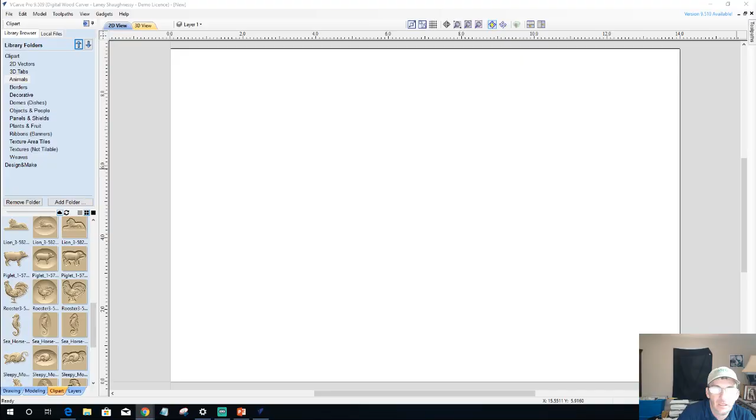So what we're going to do is hang out for a moment. If you guys have any questions, go ahead and ask them while we let everybody pile in. We're about 6 minutes early, I figured I'd come in. I saw Dave and Alan and Todd and Debbie pop in, so I thought I would pop in and say hi to you all.

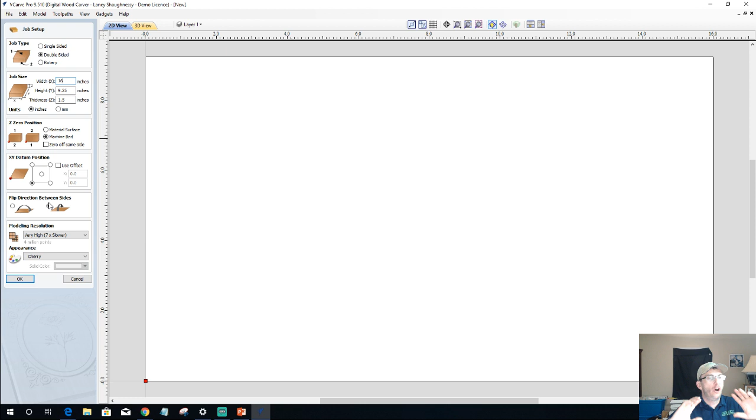Now I will be flipping my board along my y-axis for my two-sided project, so I have that selected. I'm going to click OK, and that's going to set us up and get us going.

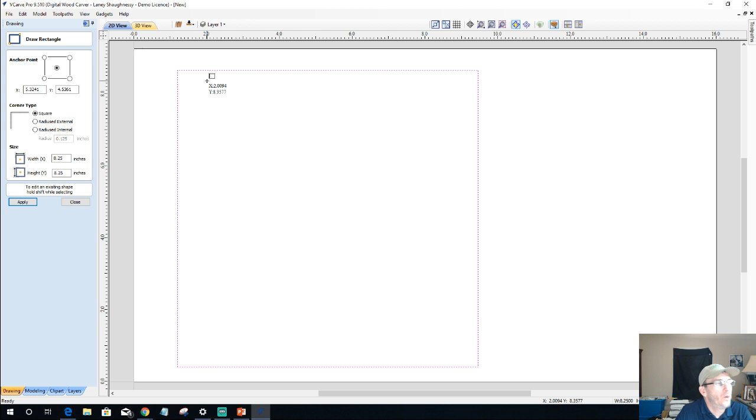What I want to do is reference everything off of, even when I'm doing my profiles and things like that, a rectangle. We need that 90-degree angle anyway, so this just kind of gives me that look, and now I can come in and start laying out my design.

One of the things is I want to offset inward this rectangle. I'm going to close the rectangle tool and use the offset tool to offset inward about 3/4 of an inch. Imagine this being my frame, and I'm going to have that back piece.

Now, when it comes to the actual corbels themselves, you can just make the decorative part and then make the 2 flats that you would miter cut together to create that 90-degree angle and everything.

If I were to illustrate that, let's say if we had one part here, one part here. Let me do some scissor trimming.

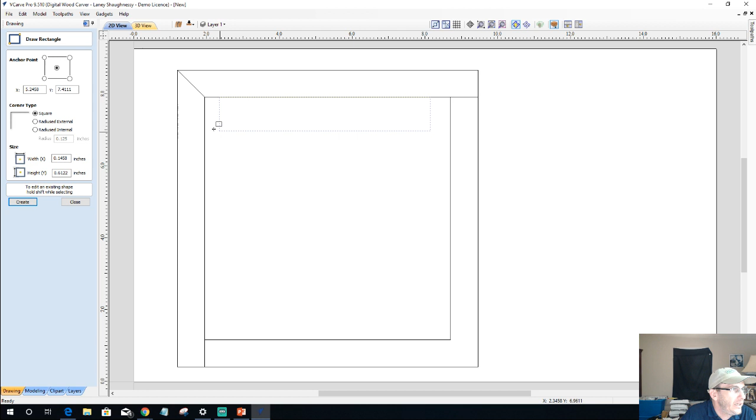So imagine you've got your 2 parts mitered together to create that 90-degree turn. A lot of times someone will do that and it'll have a decorative edge on it, and then of course they will have a smaller inner part. I'm just freehand drawing right now just to illustrate this.

That part would also generally, a lot of times, do a butt joint on that, but you could also miter that as well. Not the straightest looking angle in the world, but you can create that kind of corbel frame type of thing, and then your decorative part would be in here.

Now, one of the projects we're going to make, I'll give you a little sneak peek, and then we're going to go drawing the 2D stuff first. Imagine if I came into my clip art and let's go into the animals. I'm going to grab this seahorse here.

Let's go ahead and mirror him. I don't want to create a mirror copy, I don't want to flip it about job center, I just want to mirror him the other direction. I'd probably go right about here, and then there would be some material that's connecting him back here. But imagine a decorative little seahorse corbel, which we will be making in this class here in a moment.

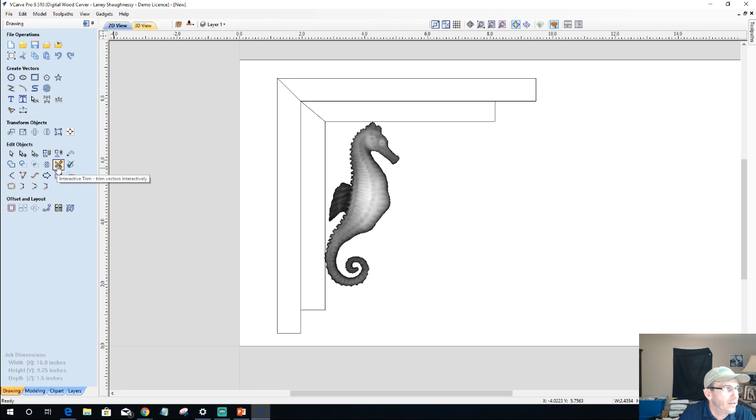So I was using the rectangle tool under the Create Vectors menu, the third icon, first row, to create the rectangles. I was also using the line drawing tool, which is the first icon on the second row under Create Vectors. And for trimming, I was using the interactive trim tool under Edit Objects menu, second row, fifth icon. So that's what we're working with.

But imagine we're going to be making this two-sided seahorse project in a few moments, but not right now. I just wanted to give you some visuals to think about. Okay, let's get rid of some of this stuff, and I'm going to get rid of everything actually.

And I'm going to go back with my 8 1/4 by 8 1/4. Now I want to talk to you about version 9 as I go, kind of little lessons here and everything.

With my rectangle tool, I can start drawing out my rectangle, and if I pause, keeping my left mouse button held down, I can just type in 8.25, a comma, that'll give me my width, then 8.25, and hit the enter key to create my 8 1/4 by 8 1/4 box. I can also use the menu over here if I wanted to, but I can freehand and type in those actions right away.

Now, top tip of the day. One of the newest and coolest things as of version 9 - we're working in 9.5 right now - is some of the enhanced shape editing tool enhancements that are available to us.

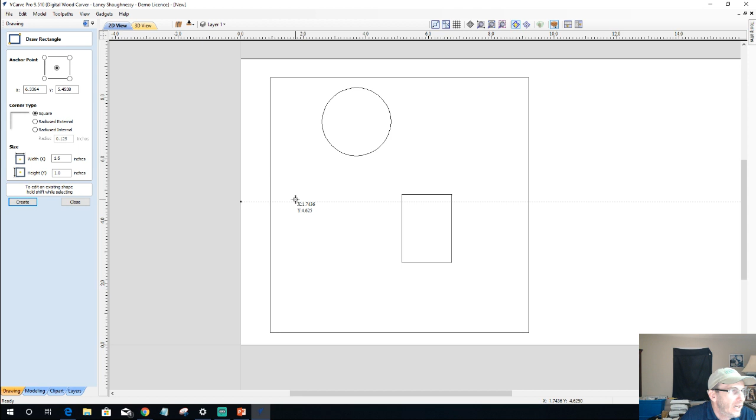Well, your shift key - if I had my rectangle tool open and I wanted to edit this rectangle, if I hold my shift key down, it will allow me to select that shape, and then I can come in and edit it however I want. So there's a little keynote down here: to edit an existing shape, hold the shift key while selecting it.

Just a little top tip. They do put the tip right here for you in your rectangle tool, but some of you might not have really seen that or paid too much attention to it, and just thought that would be something of interest to you. All right, we're done with that.

All right, so the first thing I'm going to do is come back and get where we were. I'm going to offset inward three-quarters of an inch. This is going to be kind of my working area, my decorative working area in here.

So what I want to do is go into node editing mode here, and I'm going to delete this node on the bottom right corner, delete that point so I can kind of get this triangle going on here. This is going to be my working area for the decorative part of my corbel.

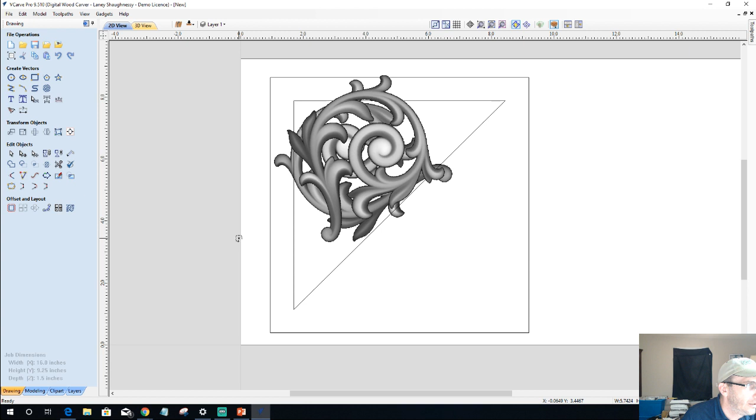And then I'm going to rotate it - just freehand rotate it, like that, slow motion. Let's go there. And then I'm going to size it. Well, let's move it into place first. I'm going to have it probably about like that, and let's see if I stretch this out a little bit. Let's rotate it some more.

Right about there. All right, now what I'm going to use in the modeling tools is a tool called Create Vector Boundary around a selected component. This will allow me to basically trace this model in a sense. So I'm going to use that - I've got my selected component, and I'm going to create the vector boundaries around it.

And now with that, I can go ahead and delete my model to give me the vector outlines for that trace. Now, on these back sides here, if I wanted to create my two shapes and things, I can use the subtract tool.

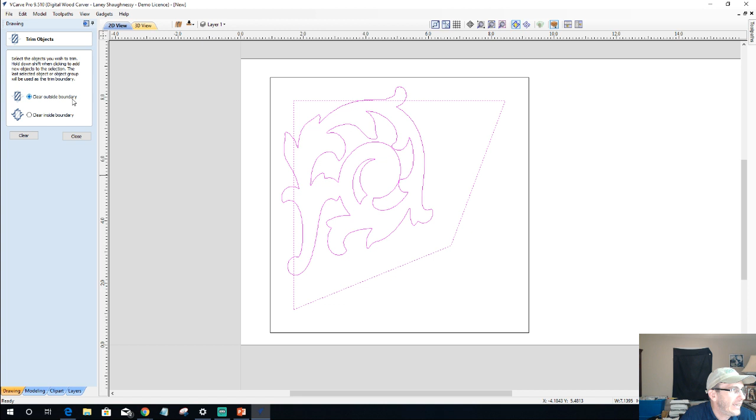I want to select my corbel or decorative design, then my boundary, and clear everything outside of that boundary away. Now what that does is when it clears everything away, it redraws that vector, giving me a closed vector here, not an open one. But if this were going to be one solid piece, I'd most likely weld these together, trimming these intersecting lines away to make this one whole piece.

But it's not going to be one whole piece, because this shape here is going to be recessed in a bit. So I'll have my piece that's being cut out here, and then there's going to be a step down before my shape gets created. So it's going to be kind of recessed in.

Does anyone else have an echo, or is it just Debbie? Let us know.

Alright, Aphrodite, okay, so now let's go ahead and do some vector trimming. I'm going to right click on this node and cut the vector here. Right click on this node and cut the vector here. That will allow me to get rid of this line.

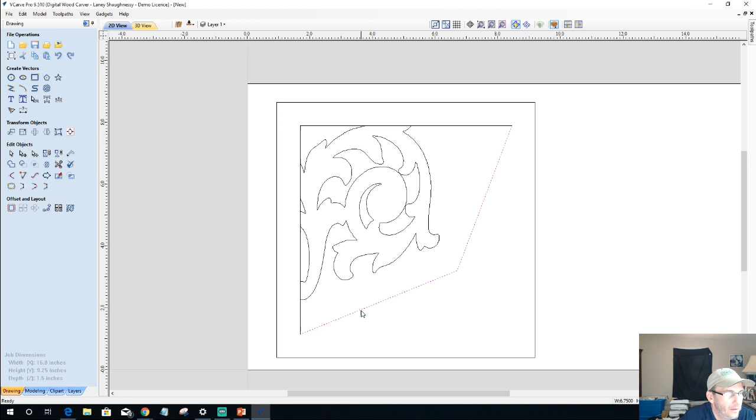On this vector here, I'm going to use the extend tool, and I'm going to extend this line down to here, and extend this one over to here. Okay, now with that, I can go ahead and trim this line away.

Now I have some decisions to make on my decorative piece here. Let me group that together. Do I want to maybe stretch this out a bit to create that unique shape, give me more of a cool look? Maybe try to stretch it down a bit. Alright, that'll work.

Now these areas, this area is going to be remaining, right? And this area in here is going to be cut away, and this area back here, all these little pocket areas are going to be cut away. So I need to really think about that depending on what bit I'm using when I profile cut these parts, because if I use a 1/4 inch end mill, I'm going to get a completely different look, because the 1/4 inch radius will not fit up into this tight point.

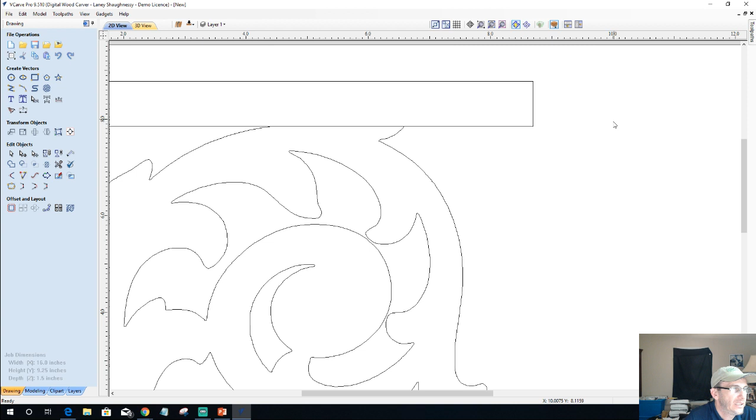Let's create a little bit of a molding, if you will. Now, what I want is for this molding piece to kind of start in here and trim down inward. And therefore, I'm going to... what am I going to do? What are we going to do here?

I want this to be exact, so we're not going to fly by the seat of the pants. Bear with me a second here. From this corner, I want to come back. I'm going to right click on my guideline and create a relative guide in the negative direction. I'm going to come back - this is 3/4, so let's go 3/8.

And then if I grab a guide up here, I want to come back up 3/8 - up is going to be positive. And that will give me the opportunity to draw my polyline along the guideline here. Spacebar to finish it off. And now I can get rid of my guidelines to create this. This is going to end up being my drive rail for my molding toolpath.

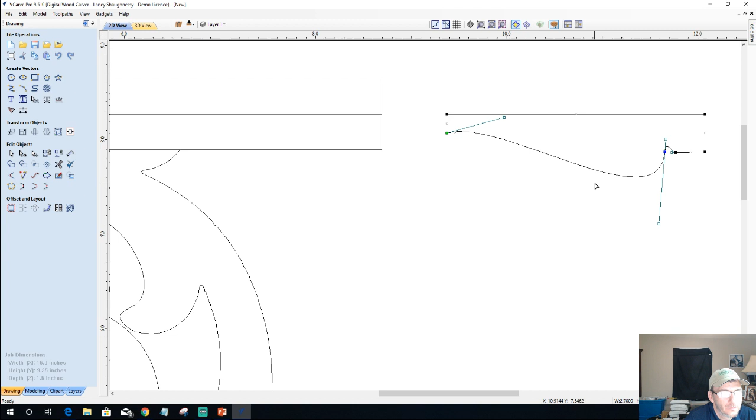I want it to step in, so let me get my line tool here. I'm going to go back into node editing and insert a point right about here and make this a straight line. And then I would like to see it step in, and... I've got to make this on a much smaller scale.

If I were to rotate this 90 degrees, I could very simply hit the number 9 key on your keyboard. By the way, the number 9 key on your keyboard rotates 90 degrees.

But I would like to see something on this side part here, a very small where it maybe comes out a little bit or comes in. I can't be too dramatic, so I've got to figure out exactly how I want to do this. And so let's start off simple.

Let's go into node editing on this. I do not need that. When you're drawing a profile, you do not use the bottom span - you do not use the bottom span on this. And so...

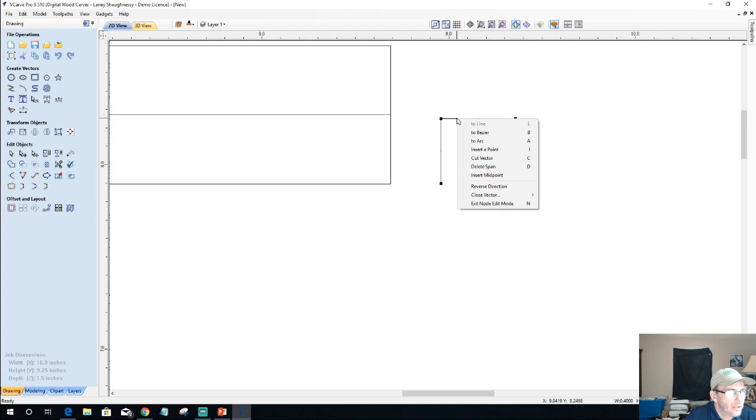We'll insert a point, insert another point. And if I select this top point here and hold down my shift key and grab this bottom one, then that bottom one I can align to the first one I selected by either X or Y. If I hit the letter X, it will pull that into alignment - it kind of creates that little step down for me.

And now I can come in on this node here and use my down arrow key and just kind of pull it down where I want. I will grab this to right about here, and I'm just going to do a very simple bead of sorts.

And I am going to use my fillet tool - I'm kind of all over the place here. I'm using my fillet tool, and I'm going to use an 1/8 inch radius and see if I can throw... oh, I don't want to do that. Let's try a 1/16 of an inch radius.

There we go. I'd like to see something like where, imagine this being the top of my part, where it kind of recesses into my other piece. And this is on the side, recessing in on the side. If I reference the part again, you see how it comes down and then rounds over. It's basically just running a round over bit type of deal on there.

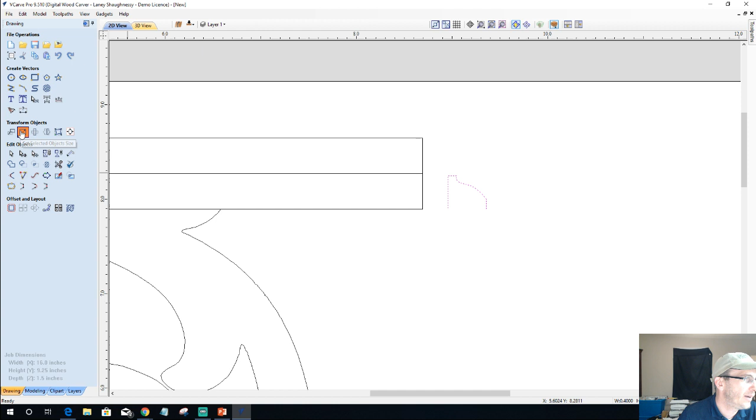I'm going to use my molding toolpath to help make this shape, and that's what I'm attempting, if I do it right. This distance here is 3/8 of an inch, so my width here needs to be 3/8 of an inch, my width on my part needs to be 3/8 of an inch. Let's look at our job size. I was close, I need to be 0.375.

Now let's see what happens when we use our molding toolpath. If I select my molding toolpath over here, hold down and grab my drive rail, hold my shift key and grab this part here, you see how it's coming up to the back side, and I don't want it on the back side, I want it on the front side. So if I grab this green node and reverse the direction, it will pull that down into there. I'm going to use an 1/8 inch end mill, just a very simple 1/8 inch end mill for this, and I'm going to calculate this toolpath.

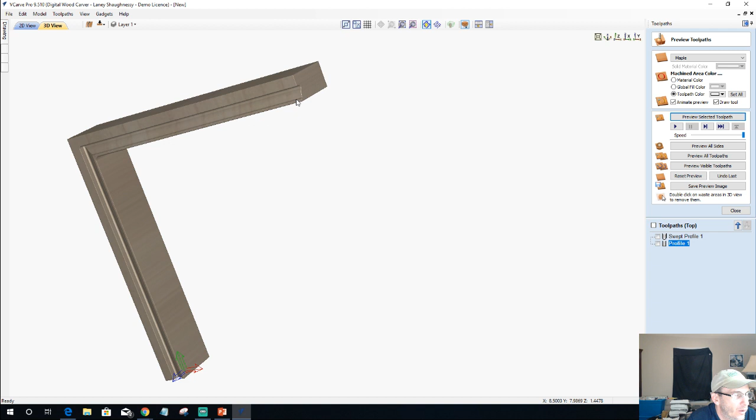Okay, you see what's happening here is my profile is backwards. My little recess is coming in up towards the top, and I need it to come in towards the bottom, not this way. So I have to reverse not only the direction on the drive rail, but I also have to reverse the direction on my little profile. Let's recalculate that, and reset that preview and preview both of those toolpaths again.

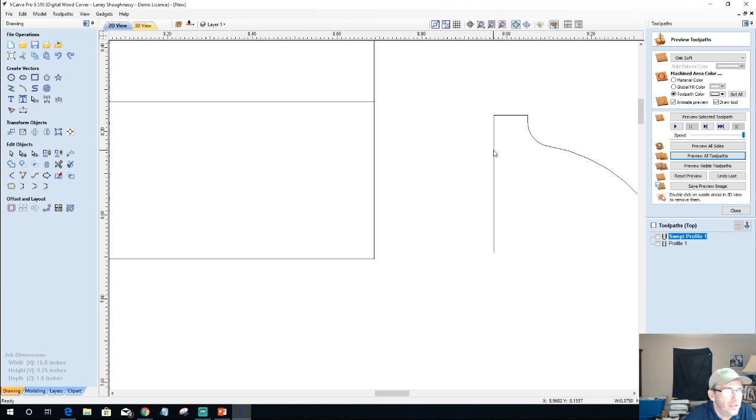So what I will do is go into node editing mode, and I'm just going to grab, which one is it? Let me look at my 3D cut again, let me see which one exactly it is. So it's the step down, and then it kind of runs in, a little step down, runs in. So that should be this part here, which means if I grab this...

It's hard sometimes to get disoriented the way the direction of it is, so bear with me a second, at least I get a little disoriented. So my fatter part is there, and then it's coming up. Okay, so I should be able to grab this here, and bump that out a little bit using my left arrow key. I just selected the node, using my left arrow key to pull that out. And if I come back into this swept profile and recalculate it, let me see here if it gave me a little bit more.

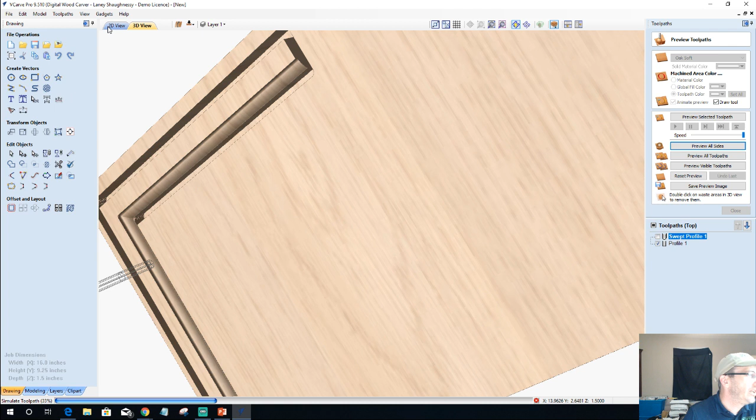Let's see what that did for me. No, I'm still ass backwards. All right, so what I'm going to do... I'm still backwards on that one. All right, stop there, we can stop that. I don't need to see the rest because I'm moving the wrong dealio.

So what that bottom part is, is this part here. And so what I want is a little bit of a straight edge. So let me add in another node.

I'm going to take and grab this vector here first, this one second. I'm going to use my Y key to pull that up into alignment. And then I'm going to bump that out a little bit. Okay, so that should give me a little bit more of a lip here on this bottom part.

So let's one more time, let's go in and calculate this toolpath. It should be good. And on my profile toolpath, the bit, you see where my model is, right? It's down below. So it's cutting that lip off.

So what that means is I need to raise up my guideline a little bit and raise it out. You know what I mean, Vern? So let's turn that off. Thought this was going to be an easy one. What is my overall width here on this? I could just resize it, but then that kind of defeats the purpose.

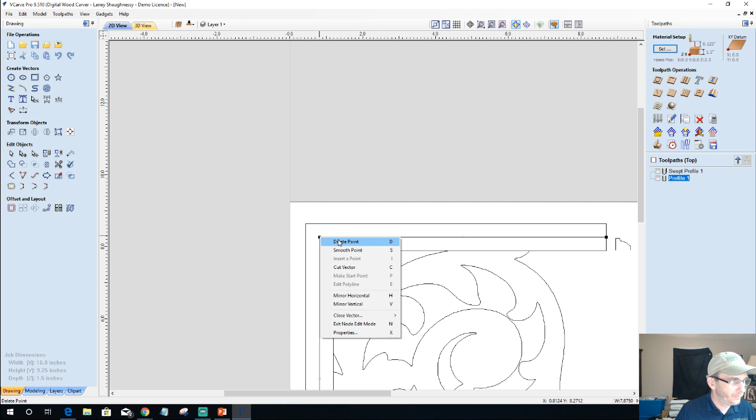0.4088. Well, if this line is 3/8 of an inch from here, then I need to move it up an additional bit. So if I use the move tool, I'm going to go on my y-axis, which is up and down: 0.4088 minus 0.375, because that's where I'm already at. Hit the equal key on my keyboard, and that's the remaining distance I need to move. I'll be moving up in the positive direction, so I can pop that up just that little bit.

Same thing here. If I come in and do 0.4088 minus 0.375, and that should be on my x-axis, and I want to go to the left, which is a negative number. I can move that back. And as far as joining these two, I can use my extend tool. I can click here and then click here, and it'll wrap that corner for me.

Okay, so now if I go back into my swept profile toolpath and come into my part here, I've got to reverse the direction of the node. Okay, you can see my lines no longer extend past my part, meaning I moved exactly where I needed to move.

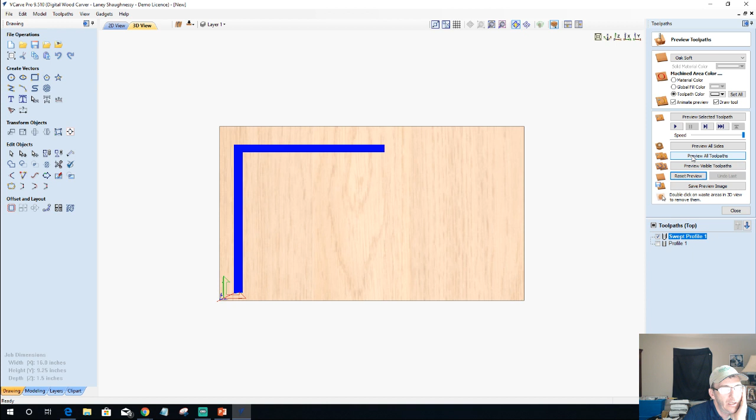Reset my preview, preview all the toolpaths. Oh, before I preview all the toolpaths, I want my bit to step away from my part on both sides. With my 1/8 inch bit, I'm going to have it step away in a positive direction, away from my profile line, about a 32nd of an inch.

And I'm going to calculate that. Okay, let's preview the two toolpaths, and if we get past this part, we'll be doing good. Lord have mercy.

All right, so now if we zoom in and let me pull this down, and let's look at it down the y-axis here.

Oh, oh, you might get a little bit of buffering. I froze up my part. You may get a little buffering, guys, because I froze up my part.

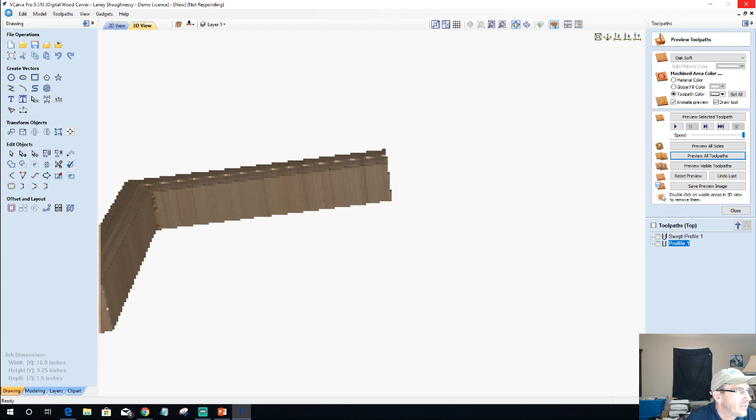This is a good reason for me right here, right now, to go ahead and save some of this work that I've done so I don't lose it all and mess myself up. So let me do that real quick. Let's save this as Corbel.

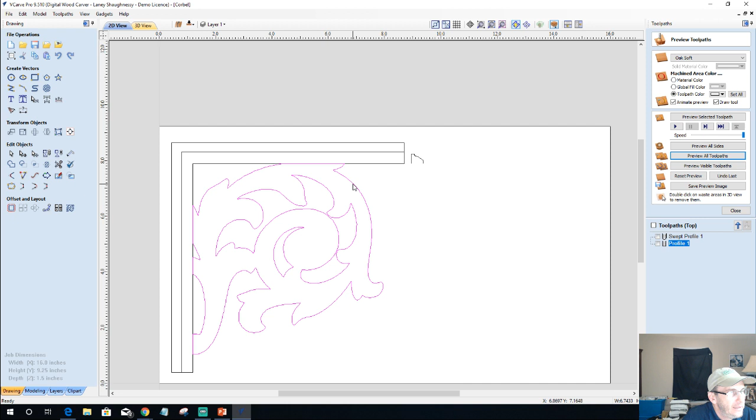Now, let's go ahead and look at how we're going to accomplish cutting this part out. And is this part going to be separate from the other part to where I will be assembling them together? Or is this going to be one consecutive part?

If it is going to be one consecutive part, then I need to be mindful that if I were to try to do a profile cut on this, what's going to happen? My router bit's going to come up here and profile cut into my frame piece and everything. So I need to be doing what's considered pocket cuts for the most part. And I'm going to be profile cutting this out and everything here, but I need to be doing pocket cuts here to cut this opening out. And this little part here, and of course this bigger part, to cut that out.

And so I've got to redraw my vectors. I've got to redraw my vectors a little bit. So let's go ahead and first and foremost, let's move off of our back piece and down so you can see the lines and see what I'm trying to achieve.

Okay, so we're going to go into node editing mode. And on this part here, the first thing I do is ungroup it so I can work on its nodes. I'm going to basically be deleting this span, this line between these 2 points. Same thing here as well, I'm going to be deleting this span. And then on here, my other straight span, all my straight parts basically, I'm going to be deleting. And then down here at the bottom, let's scroll down a little bit and get this in the middle of the screen so you can see, I'm going to delete that span.

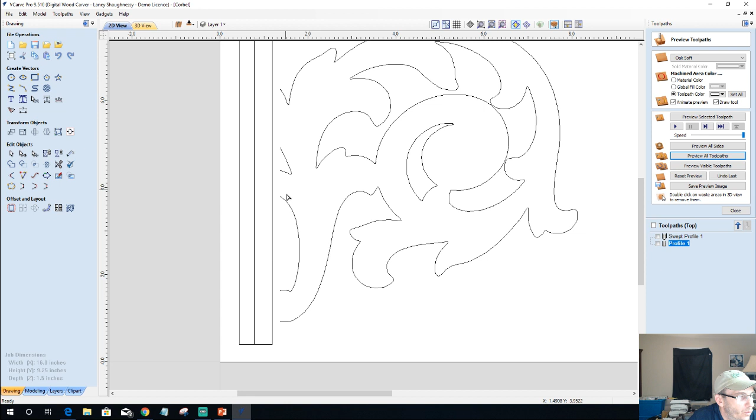I'm going to have to widen this area up. Same thing here, I've got to come in and create my areas, my little pockets. So what I'm going to do is take this part here, and let's get out of node editing mode.

I'm going to take this part here and join it with a straight line. Okay, that's going to be one pocket area. This piece here, I'm going to join that with a straight line. That's going to be my second pocket area.

And then now the rest of this area here is going to be a pocket area, but I've got to really kind of draw this one in. I've got to create my little 90-degree line here.

I'm just very simply going to take and grab this end here, and I'm going to come up 90 degrees. What I'm going to do, so I know where to turn my corner, is bring my mouse over to this end line and wake up this node, and it's going to give me my reference line.

See if I can wake that node up, that point there. Okay, it's going to give me my reference line, and that way I can come in and turn in. Now my 90-degree line actually dead ends there.

And so this is going to be my pocket area. So what do I do with this little straggler? Well, I just cut him off. I take my interactive trim tool and I cut him off. So there's my third pocket.

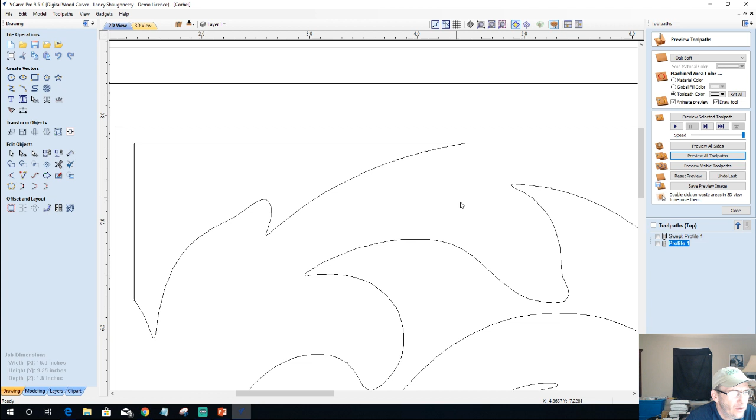I could definitely come in here and kind of just bring this around a little bit. It's not going to really affect my design. It's just going to be more of a step down right here, almost like a little indentation in the leaf, whatever you want to call this.

Same thing here, I want to keep my straight line, so if I change this part so a bit can fit in it, then I need to round this off over here. And then I need to think about down here as well, and really consider putting a radius in this corner. That applies down here as well.

So let's look at where we want to go. With this, I'm going to start here, and I'll go into node editing mode. I'm just going to cut the vector here. And now that I've done that, I can move this part down. Let's go ahead and...

Go back into node editing mode. And I'm going to just grab all of these nodes here, and not that one at the top that I accidentally grabbed. So hold your shift key and turn that off. I got another node hiding in plain sight, so first thing I got to do is move him down a little bit. There we go. Now I can come in and grab all of these nodes.

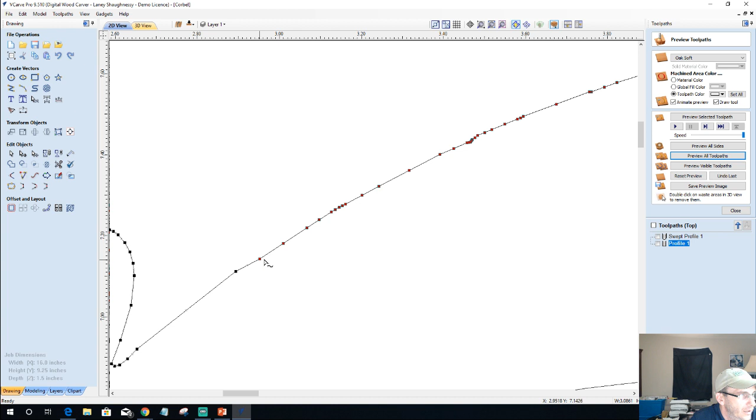Hold down my shift key and grab this extra one up here that I couldn't get a hold of. I'm just going to use my down arrow key because I want to keep somewhat of a shape. Now I'm going to get a jagged line here, but I'll smooth that out in a minute. Right now all I care about is getting this arc down.

I'll be rotating and smoothing things in a moment. But I believe that should work if I were to draw a 1/4 inch diameter bit or circle, in order to be able to get in there, I've got to, if I'm pocketing this out, my bit has to be able to get up on it.

So the thing that I need to do is go into node editing. I'm going to select all of these nodes again, including these two. All except for this one I'm going to turn off, and this end one I'm going to turn off. I'm going to have all those selected and make sure I got them all, then hit the letter D on my keyboard and delete them.

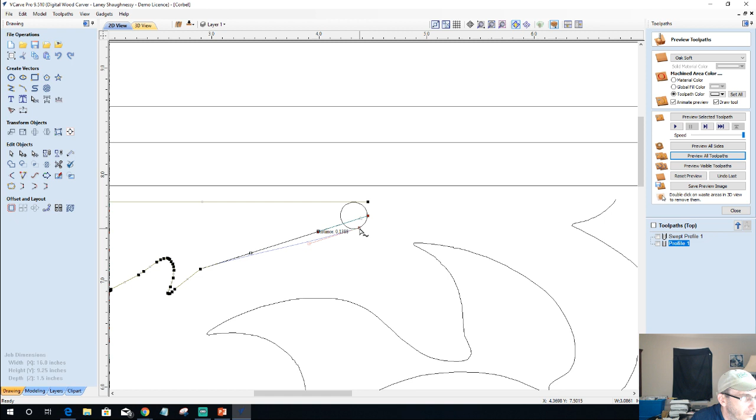I'm going to turn this into an arc or a Bezier curve, either one. I'll go with a Bezier curve, and I'm going to pull this down to roughly here. And now I'm going to clean up my curve.

Let's pull this down a little further because I'm in the wrong place. And let's pull up this curve and smooth it back out. Then I'm going to take this vector and join it with a smooth curve. And I'm going to fix this here, and change that to an arc.

Now my 1/4 inch bit should be able to fit into that part, and it did not distort my leaf too much. It's not going to make it too bad looking. It's the sacrifice I have to endure because I'm using a 1/4 inch bit. If I was using an 1/8 inch bit, I could reduce that by half.

Now here and here, once again, my 1/4 inch bit's not going to get in there, so I really got to change this around. Basically I'm just going to be redefining my leaves a little bit, those little leaves.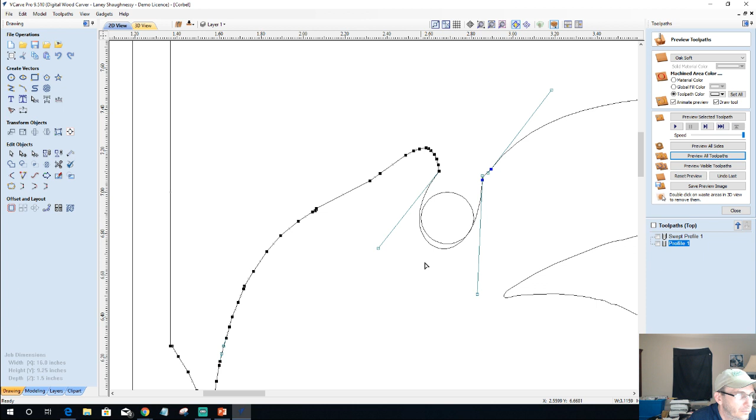Let's see how ugly that makes that. Not too bad, not too bad. This one I gotta kind of bite the bullet on.

Man, I honestly have to think about changing my bit diameter. All right, I tell you what, I'm not going to cut this one all the way out. I'm just going to pocket this down quite a bit, and I am going to use a 1/4 inch end mill with that, and I'm not going to change any of the shape on this.

And for this guy here, I want to cut it out. So I'm going to use my fillet tool, and I need an 1/8 inch radius. I should be able to put that radius there. All right, it won't let me radius here. My fillet, it won't let me fillet there.

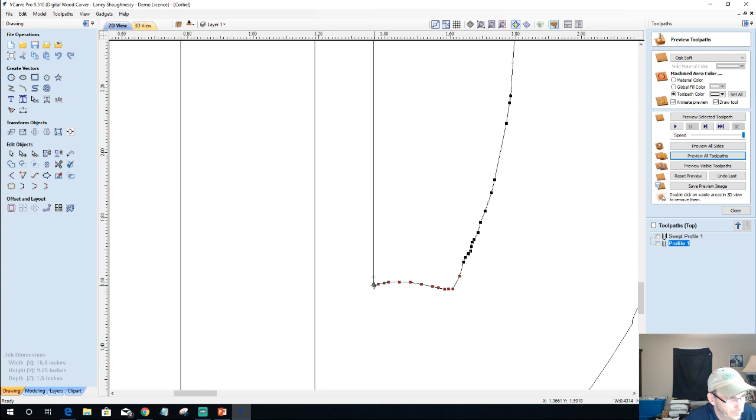So... ooh, don't want to do that. All right, so I should be good there. Okay, now that'll take care of my 3 pocket areas. This one's not going to cut all the way through, I'm just going to pocket that down. It'll be a little decorative recess.

All right, it is what it is in here. I'm just going to have to do a V-carve type of tool path, a V-carve with a flat depth type of deal. So my end mill will get what it can, and then my V-bit will come back and do the decorative edges, to give me these decorative edges.

But here, I've got to widen these areas out. I have no choice. So, ooh, doggy.

And I'll come back, Debbie, and answer your question. Baron, I'm not sure, I haven't noticed any buffering yet, but everybody else, let me know if you're getting any buffering.

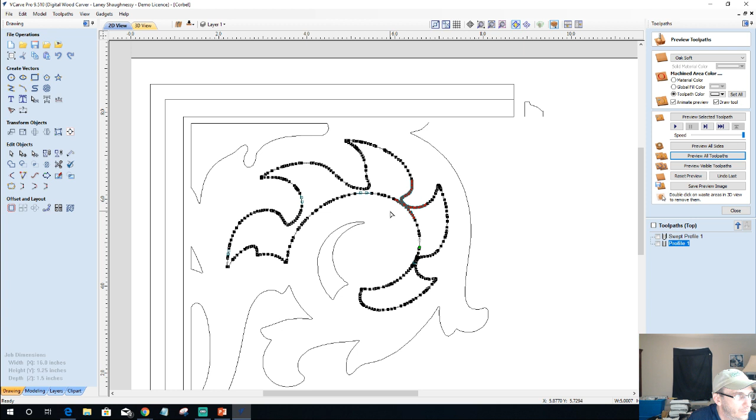All right, on this one, I'm going to cut the vector down here, and then over in this corner, I'm going to cut it here. And what I'm going to do with this is, now that that vector is basically all alone, I'm going to offset it, inward a distance of 1/4 of an inch.

Deleting the original. And then I'm going to take this node here, and these nodes here, and delete them, D on the keyboard. Same thing with that one, and here, I'm going to take these guys and D on the keyboard to delete them.

Now my 1/4 inch bit should fit in there much better. So I'm going to get out of node editing mode, select these two here, and join with a smooth curve once and twice. So again, it did not distort my shape too much, but it gave me what I needed for my bit to have clearance.

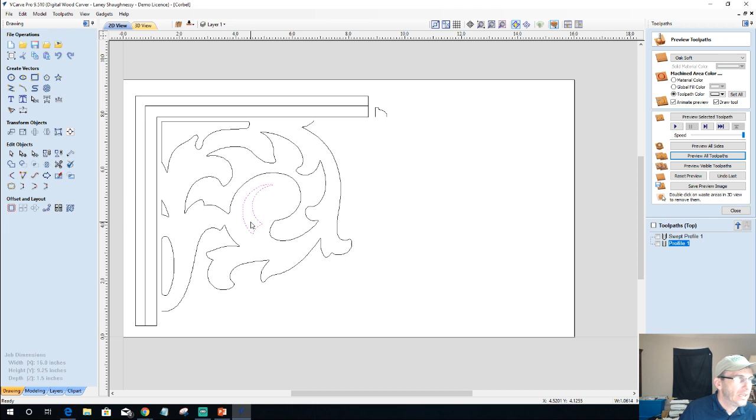Now, Debbie was asking, by cutting off the tail at the top, doesn't that change the distance between the frame and the design? Won't you have to change the part to the right to make the distance equal to the frame? If Debbie, correct me if I'm wrong, what you were referring to is that little tail that was at the end of this piece.

Basically, if I took my entire part here and grouped it together, if I came back and moved back up, micro movements - hold down your control key for micro movements.

And here. What Debbie is talking about is, I got a little bit further to move back. Bear with me a second. Right there - what Debbie's referring to is this line.

So by that tail, because it kind of swept up a little bit into this part, does that throw everything off? Well, the simple fix is to ungroup, go into node editing, select this, select these nodes here, and use my control up arrow key to bring them into alignment to even that part back out.

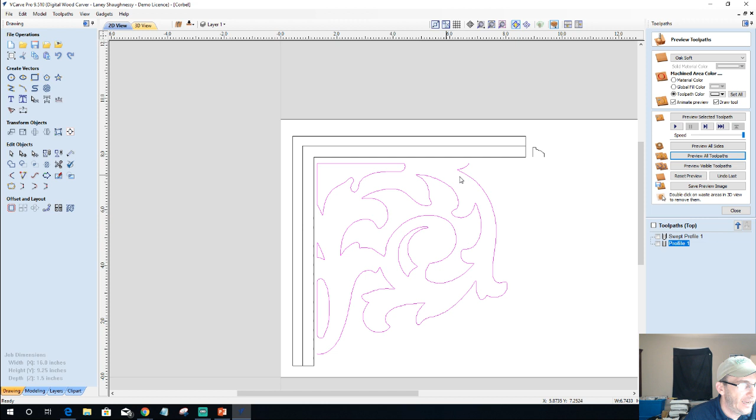Debbie had a good visual on that. She saw that by cutting that little tail off there, doesn't that change where that end piece is going to meet where that end piece met that you cut off? And it did. So all I had to do was move this line up and make it level with this one.

Okay, so I've got pocket cuts and I've got profile cuts. But now, how do I address the issue on my profile cut when I'm profiling - how do I address the issue that my bit doesn't leave this radius here? Very simple, I put the radius in there myself.

So what we need to do is let's get back to where we need to be. Let's get this part back lined up. Okay, this one part I wasn't expecting to take the whole darn class. And what I need to do is know when my profile bit is coming and cutting this profile that it's going to create a rounded...

I'm overlapping a little bit, bear with me a second. Perfect. Okay, I need to create that little radius there. Might as well, right? So I'm going to basically come in and...

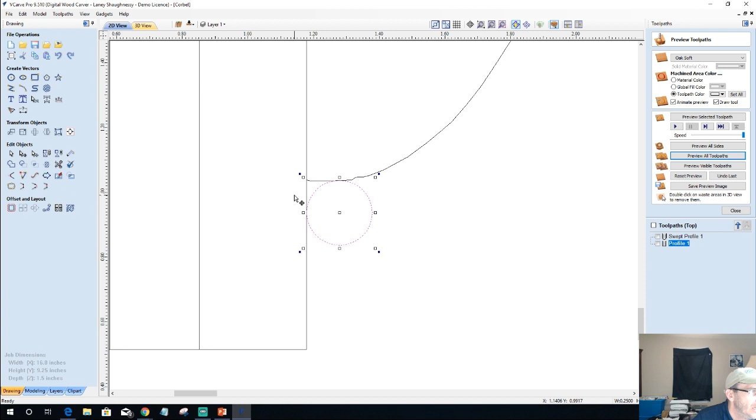Let's see here. So if this were to cut with my router, the bit's going to leave that little radius there. So why not just go ahead and get it in there to begin with, right? And so I'll go ahead and - is it not going to let me, not going to let me go?

When your scissor tools and things like that don't work, there's an obvious reason. And one of the obvious reasons is I can't trim to a group, so I got to ungroup this stuff. All right, so if I trim this away and trim this away, that'll give me my little radius there.

And there's a node right here - this little chunkadilly right there. I don't need those, so let's get rid of them. Kind of smooth that back out. All right, now up here, same thing. When my bit comes, as it goes around this outer edge here, it's going to create that radius. So we might as well get it in there already.

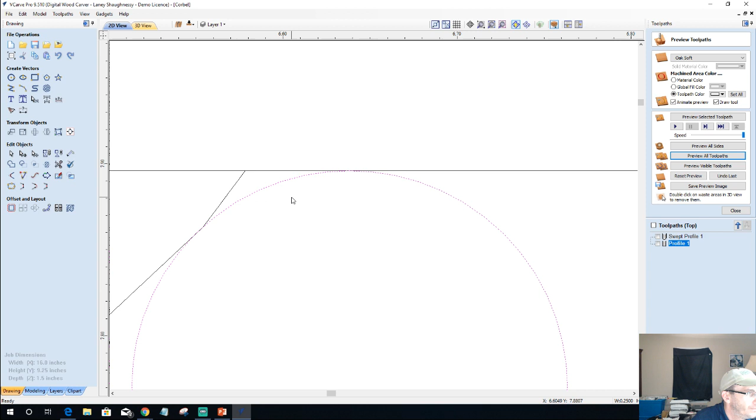Work with me, Buster. Work with me. All right, let's see what else is. Oh, too much of an overlap. Bear with me a second. We'll get her, we'll get her, Tom.

There's an easier way to do this. I could have just arced it. I'm just trying to be visual in some way. I could have just drawn a simple arc, but I'm just trying to be a little bit visual so you can kind of get what I'm cooking.

All right, that should be enough to be able to trim. Okay, and what that will do is give me kind of that little sweep. That's all I care about, is my bit's going to just sweep around as it's doing the profile cut.

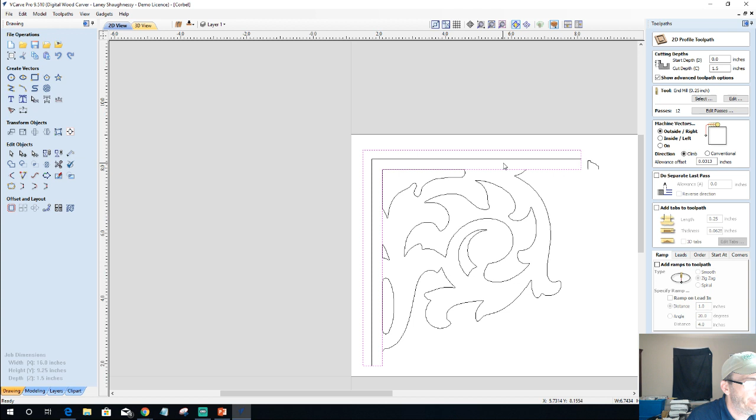If I come in, I just want to make sure I'm not overlapping too much. I'm right on the line there. I'm right above the line there. So let's, I want this to be exactamundo.

Zooming in and out is the roller wheel on your mouse. Very beneficial.

Okay, all right. So my profile toolpath, let me ungroup my parts and all. Profile toolpath, if I come in here, my profile is going to come around and that line is going to be gone, right? And what does that do by trimming that line away? It gets rid of everything and puts my profile exactly where it needs to be. Okay.

So now let's go ahead and create our profile toolpath. It is what it is there. That's fine, it's going to be what it is. All right, 1/4 inch end mill.

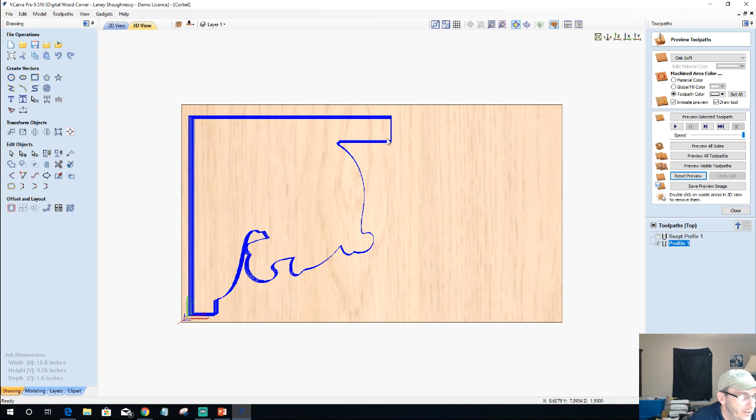Because that's important. And let's look at the initial shape of our profile here. You can kind of see that outline there, right? All right, now our pocket cuts.

I really am going to lose some of the detail in these pocket cuts, but it's okay. That's going to be a pocket cut with a 1/4 inch end mill. By the way, I need to - I'm an idiot - because this is a two-sided part, so I should not be cutting all the way through my material on one half. I should be using the other half as well. So for this pocket cut, I'm going to be cutting 3/4 of an inch, using a 1/4 inch end mill.

Now, something very that we need to think about - remember now on these are going to be stepping down a bit. And I really wanted this whole thing to step down a bit, which it will, it will, because there's going to be - yeah, you'll see in just a moment.

But, oh, there was a point to this. I could use my V-bit with a flat depth of sorts, so it's not really a pocket cut, so it's not going to work and all. But if I wanted to try to V-carve or chamfer these edges, I could use my V-bit and an inside profile cut to give me some nice little definition here where the end mill's not going to do it for me. So all of these things we can explore after we get the initial toolpaths created.

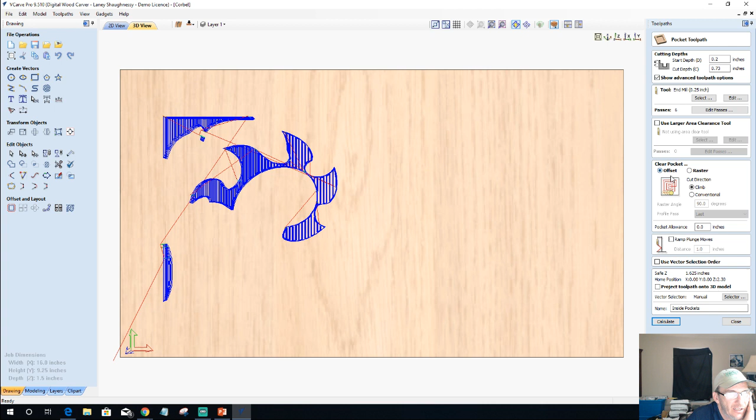Okay, let's put our profile down where it belongs. So let's look at our inside pockets here. If we preview, I want this to be an offset, a more optimized toolpath is an offset, not a raster. So let's calculate that again. There we go. Let's go ahead and preview that selected toolpath.

Okay, so you can kind of see where we're going with that. All right. Now, on this inside piece here, for it to look proper, it needs to be cut all the way through and all that stuff. So I've got some serious decisions to make.

If I just pocket this, if I include this with this pocket here, and I calculate that, I'm not going to get as big a swirl all the way around. And so if we were to preview that, I'm only getting kind of that semi swirl, and it doesn't really curl up like it should. Well, I'm thinking about doing a little bit of a chamfer with a V-bit to dress this up some.

But here, because my bit isn't going to be able to cut out as much as it can, I'm just going to do a V carve on this, just a very simple pocket. It's not going to cut all the way through. So I'm going to use a V-bit, a 60-degree V-bit on this. I do need to start at my 0.2, and I'm going to calculate that. And we'll preview that cut.

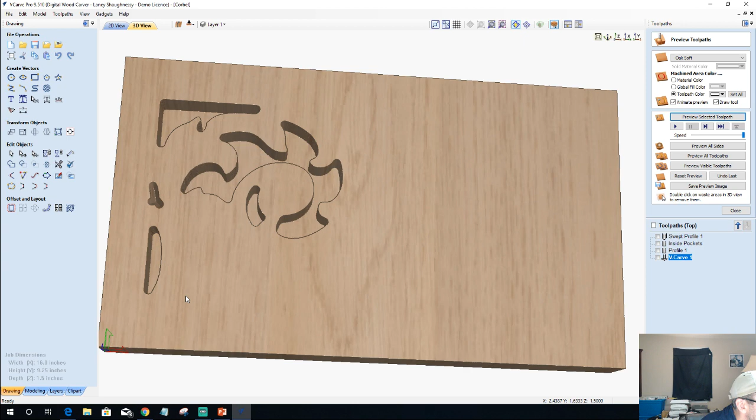Okay. It's going to look weird until everything is cut out and stuff. Not the prettiest little design. And also it looks weird because 0.2 inches of this top surface has to be removed. You'll see that in just a moment.

All right, so we've got our swept profile. We've got our inside pockets, and we have our profile cut. And then we have our V-carve. Well, there's one major piece missing here. I've got to get all of this area down to 0.2 here.

So one of the things I'm going to need to do is come here, and I'm going to just snap down here. I'm going to snap up here, and I'm going to come all the way across and snap here. Now, I could just finish this rectangle off and all that, but what's the point in doing that? So what I'm going to do is come to right about here.

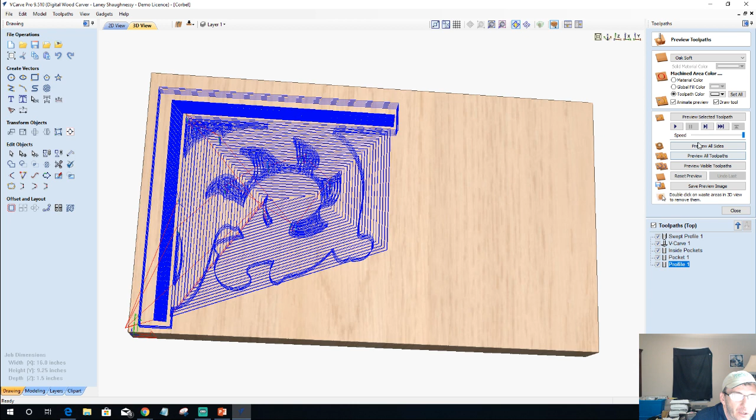So how many of you still with me on this? Or did I lose you anywhere?

Okay. So as you can see here, if we look, that pocket coming down 0.2 brings this part inside to this lip here. Okay. So that way there's like a step into this part. All right. Now, let's go ahead and

flip this, and I'll end up mirroring all this and creating the other second corbel, but we got to think about how we're flipping this and what we got to do. Well, first thing I got to do is create my alignment pin holes, and so I'm going to take and grab a 1/4 inch hole and put it here.

Let's try 0.25, that would probably be more appropriate, and then somewhere over here. All right, on these two here, they are atypical design as far as the alignment. They're not straight across from each other and all that, but it's fine for the method that I'm using.

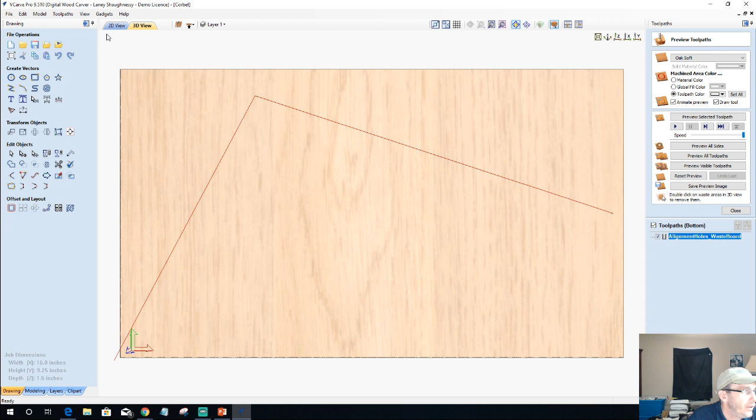I'm not going to preview them because they do not get cut into the board. But now, you know, my toolpaths here. So once again, I've got to recreate my toolpaths.

So we're going to do a pocket cut to 0.2 with a 1/4 inch end mill. All right, we're going to do our pocket cuts on these 3 parts.

This is going halfway through the material, so 0.75, 1/4 inch end mill. Oh, actually, remember we added this one in - I'm still thinking about how I want to handle this. I may want to do some chamfering on these, but that one's got to get added into that pocket toolpath. We ended up adding it on the other side.

Okay, and then we have our molding toolpath. Remember we've got to reverse the direction, and we need to make sure that we are using the correct direction here as we were on the other one, which I believe we are.

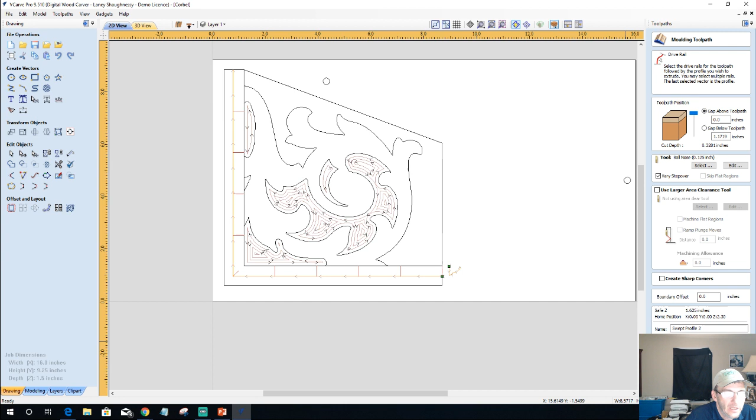And we're going to calculate with a 1/8 inch ball nose. To use that, we're going to calculate that toolpath.

And then our final approach here is our profile cut. And of course, on this cut, we would be using tabs, but I'm not using tabs, so we can cut the part out and take a look at it. But it would be a profile cut, 3/4 of an inch thick with a 1/4 inch end mill, going to be on the outside of the line. We would add tabs for this, but we'll go ahead and profile toolpath that.

And let's go ahead and preview all the sides right now.

Okay, let's go ahead and get rid of our waste areas and everything, and let's flip this board back upright, how it should be.

Okay, now if I wanted to chamfer something, I probably wouldn't try to chamfer anything on the outside. If I were going to chamfer something, it would be the insides, because I don't want my router bit chamfering into my decorative profile here. So let's just see what a chamfer does for this inside edge, and see if it's even worth exploring.

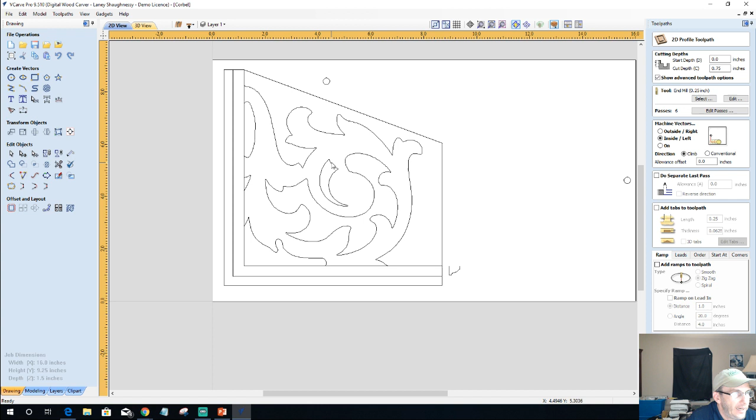It's going to be a profile cut, and we're going to be on the inside of the line. It's going to be on this part, and this part—yeah, really just those two parts. We're going to use, in my case I'd use a 60, but 90 is fine. Depends on how much chamfer you want.

Now if I were to calculate this toolpath and look at the 3D view, and go into solid view here, we can see that chamfer coming in and cutting. Because of the radius of my bit, I'm not getting out here where I want to be, but that's not going to give me a chamfer at all. I need to be out over the line.

So I need to offset it, and I'm going to be going over the line, so I should be in a positive direction. I'm going to go half the diameter of my bit, which is about 1/8 of an inch. Actually, yeah, 1/8 of an inch.

Let's calculate that again. If we come in here and look, I went the wrong way like a goofball—let's make that a negative. It would have been a positive if we were on the outside of the line. All right, so if we look here, you can see now we're getting that chamfered cut and everything.

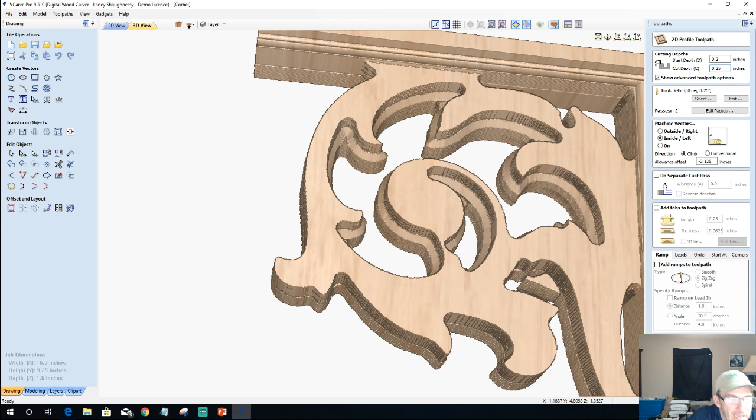Let's calculate that toolpath again, and let's preview all sides one more time.

Remember, we got that inside area pocketed down to 0.2—that's what you see being carved right now. That's why our chamfer cut has to start at 0.2, okay? All right, let it cut out the other side, let it just finish its thing, and then we'll flip it back over and take a look and see if it's something that tickles our fancy.

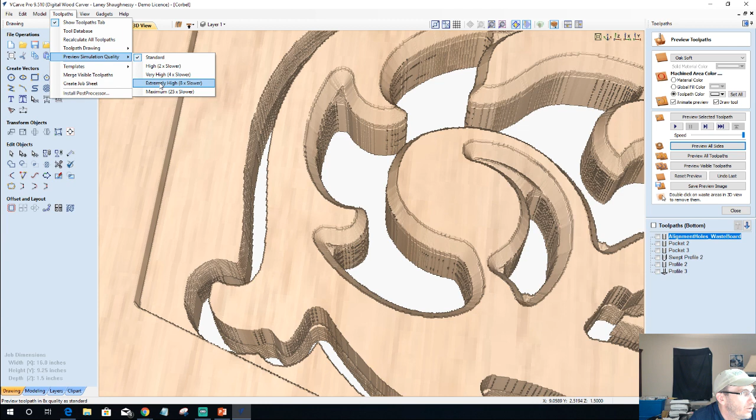All right, so right now you see how rough everything looks? Well, that's because my preview simulation quality is set to standard. It's not set to give me my 100% view—it's very low pixels. So I hate to do this, but just so we can give you a clear representation of what this looks like, we're going to have to step it up a little bit on the preview simulation. What we'll end up doing is take questions while this is cutting out.

So let's go ahead and preview that, and let's go ahead and take some questions. Does anybody have any questions up to this point while that's previewing out? No questions, or maybe I haven't asked the question on y'all's end yet. If you have any questions, let me know.

Did this little demonstration, even though it took longer than expected, mean we're not going to be able to get to the Aspire model part? We'll have to do that in another class. We might do a Corbels part 2, but we will get to the little triangle looking one, because that one's quick and simple.

Did you pick up anything from this? Would it save a lot of time to make it as separate pieces?

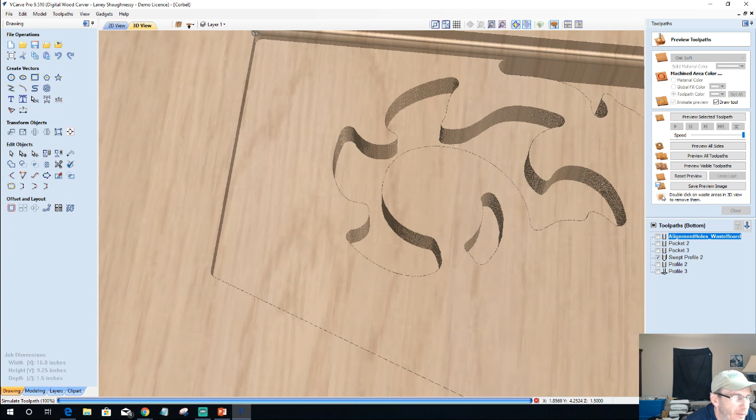Well, Debbie, yes. Making it as separate pieces, you're just basically cutting two separate profile cuts, and then gluing and assembling them together at the end. By making them two separate pieces, there may have been some things we not necessarily had to do as far as radiuses and all that stuff, but I think we still would have had to do that—there would have been no way around it.

That's a tough question. It may or may not have been necessary, but it may or may not have slowed us down by doing it as one piece versus two. I think it's probably going to be about the same, because you're still pocketing that center area down 0.2 before you cut it out with your profile cut. I think, Debbie, it's going to probably be about the same time.

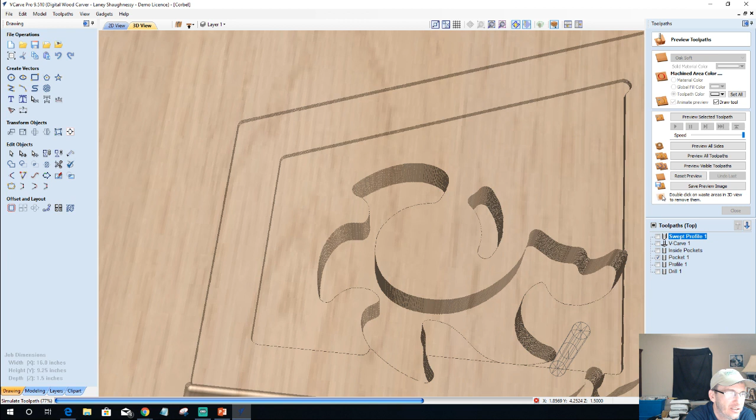Aspire is saying there's another update, 9.510. Is there anything special we have to do to update from 9.5? No, you just click on that link and run it. It's a patch, Debbie, and in that patch they're fixing some enhancements on some tools, cleaning up some little bugs. Definitely just click on that link in the top right corner of your software and run that patch. That's what I did before I started the show, I ran my patch to 9.510.

Absolutely, you could use thinner material for this design, for sure. The only reason I went with 1.5 inch thick material is because I wanted a thick corbel.

So let's go ahead and delete this waste area here. Now let's take a look, let's get rid of this and turn it a little bit and zoom out. Okay, so on the inside here, that is the chamfer, right? That's the chamfer. And if we go to the other side, let it regenerate itself, that is not chamfered. Let's see if I can straighten it out. Okay, so this is the side just cut, no chamfer on it. All right, no chamfer on it.

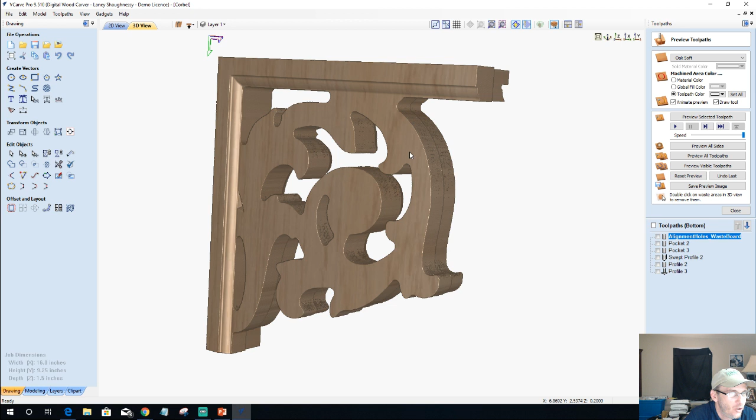Now, very interesting thing that has occurred here: my profile and everything is backwards on the other side. Look at this side profile, this is normal, this is what it should look like, right? But let's take a look, let's flip this over, let's get back to toggle between side 1 and side 2. Let's get rid of that piece. Look at my profile up at the top, and it cut inward. All right.

So we've got to fix that. Now, aside from that little faux pas right up at the top and all that stuff, aside from that little faux pas, chamfered, not chamfered, you know, that's kind of that 'tis the question.

Yeah, you can still use 1.5 inch for the frame, because Debbie, that actually gets cut out a little different. If you're going to cut it, you can cut it all out of 3/4 inch material, and you can miter and glue your part together, and then that centerpiece in. You would not need 1.5 inch material for the frame, 3/4 inch, because this is 3/4 inch thick here. So imagine if you were to cut this part out, you would just be cutting out this rectangular shape with that profile cut into it at the bottom. Very simple to do, and maybe I'll elaborate a little more on that in just a second.

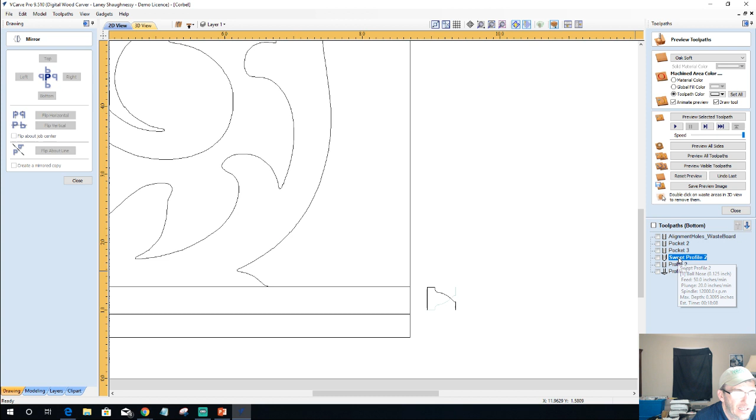My profile was upside down because, of course, it was mirrored and everything, you know. Yeah, fun times, you know what I mean? All right, so let's recalculate, we've got to recalculate that swept profile. All right, got to recalculate that swept profile.

Let's reset our preview. I'm going to take the chamfer out of the equation, I'm not a big fan of it. I may look at doing something a little different with that, but I'd most likely just break the edges with some sandpaper. So I'm going to remove the chamfer to save some time, and go back to a lower resolution on the preview simulation quality for time's sake. We're going to run it one more time with that newly adjusted swept profile, and let's take a close look at something here.

Let's preview all the sides one last time. See if we can get it to speed up for us.

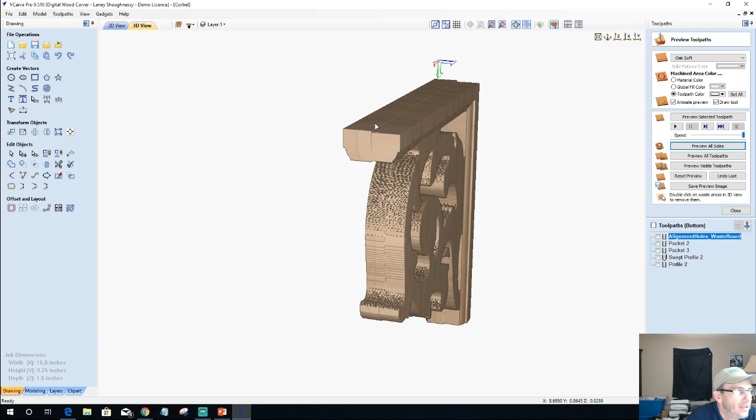But Debbie, let me show you real quick, if you were cutting all the parts out separately to assemble together, the way that you would do that quick and easy with just 3/4 inch material. All right, let's see here if that got both sides out. All right. Now, what is happening here?

So there's a couple of things happening here. One, my parts are not lining up. My pocket cuts and everything, they're not lining up, or my pieces from the mirrored side, flipping one side to the other. And it's causing this lip right here. And I'm assuming if we turn this around completely backwards, you can see that lip is off all the way around.

Why is it? Because it's not an alignment issue with my vectors, it's an alignment issue with my tool path. Do you recall on side 1 when we created the profile toolpath, we stepped away, we did an allowance of 0.0313? And therefore on the second side when we created that profile toolpath on the bottom side, we should have done the same thing, and we didn't. And what you don't want is to find that mistake a little late in the game and ultimately end up having this part all misaligned.

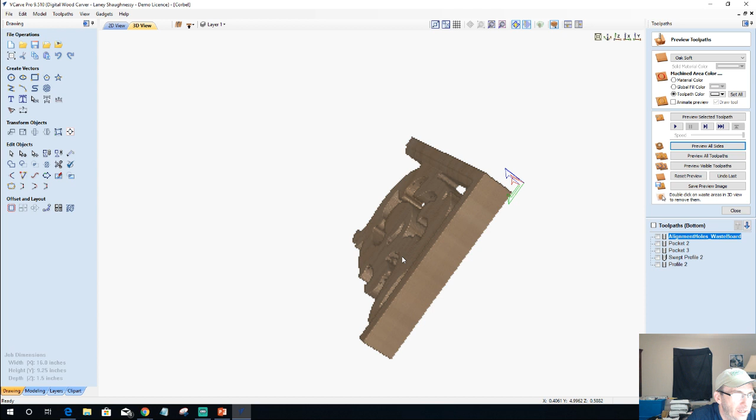So when it's a double-sided part and you're basically mirroring the same part on the other side, since it's pretty much going to be the same toolpaths all the way around, make sure that your toolpaths are to the T the same thing. Make sure we don't miss a little step or a little offset, and that way you don't end up with any discrepancies in your part.

Okay, let's get this upright again. A little bit of sanding, a little bit of smoothing. Now, of course, we don't get a very good showing here on the edges and stuff, you get pretty much what you get.

But all in all, just by tracing one of our models to get kind of a general shape and creating a small little edge profile for that step in, not a bad looking shelf corbel. Something that you see people go to Lowe's and buy all the time, or different things. So a nice piece of walnut or pine, make a little nice shelf, you can make some decorative things.

And now utilizing that, you can really get into it.

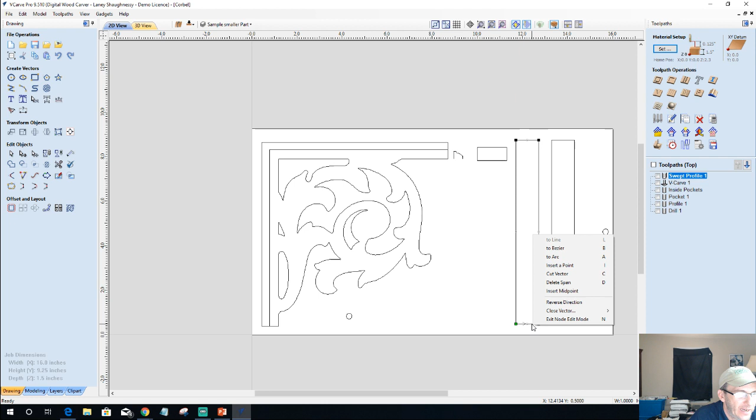Delete this span. Those are going to be the backs, the parts that get mitered and glued together. All right, one more time: molding toolpath. We'll select our profile, our part, and here, and we need to reverse the direction so it's coming inward, right? And use a 1/8 inch end mill.

Now I believe I can fly, I believe I've got my profile going in the right direction. We'll know that in about 2 seconds. Let's calculate this and see what we get going on here. So that looks just about right. Let's reset our preview and preview this selected toolpath.

Okay, so no, that's going in the wrong direction. Let's go back in here and reverse that direction and calculate that toolpath one more time. Reset the preview, preview the selected toolpath.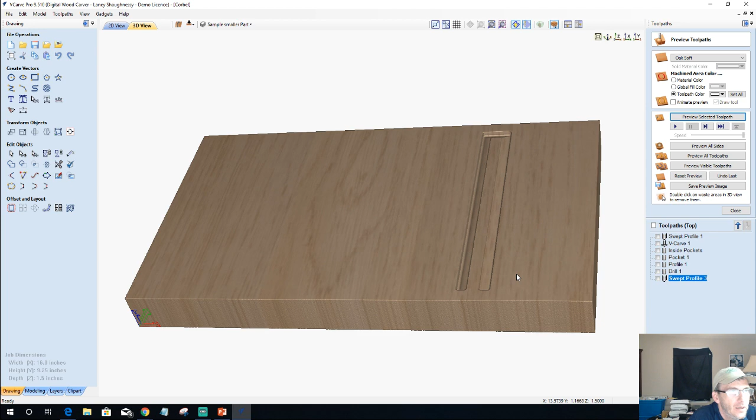Okay, very good. Now profile, let's do this one here. Let's move him over a little bit more. Let's do him — he's going to also be a molding toolpath with this guy. Again, reverse the direction and calculate the toolpath. Okay, preview the selected toolpath, so on and so forth.

Now we use those vectors to create that molding profile toolpath. What I'm going to do now is copy to a new layer, and I'm going to call this my profile. Let's call it my frame profile.

That way I can come into my frame profile and I need to close these guys back off. So join with a straight line, join with a straight line, and these both are going to get profile cut. Okay, so profile toolpath.

I'm going to cut, in this case imagine we're using 3/4 inch material, okay, but I didn't change my board size. I can — here, let's do that. Let's change our board size. 0.75. It's going to ask me if I want to recalculate my toolpaths, and no, I don't, because I'm going to go back.

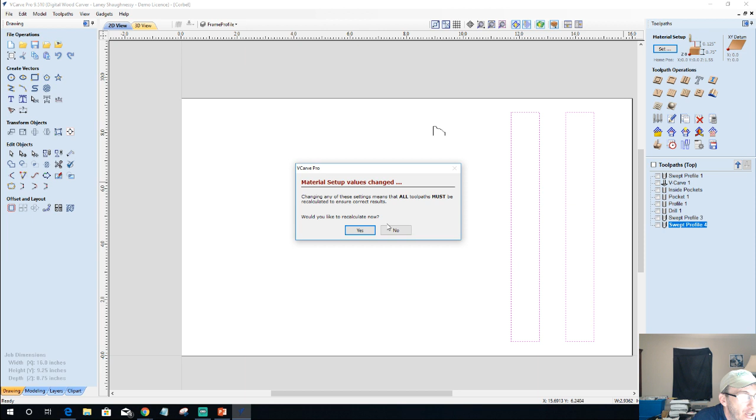This is just for a sample, but I do want to recalculate these two, and then same thing with this one, recalculate him. Okay, now I want to create my profile toolpath going through my 3/4 inch material with my 1/4 inch end mill on these two vectors here. Turn those toolpaths off, we'll calculate that.

All right, and let's preview those 3 toolpaths. Okay. So this creates my 2 parts. Let's come back in here. This creates my 2 parts, and I would just miter one end of each and glue them together in a 90-degree frame. Okay.

So now, essentially, these 2 swept profiles are going to take a while, and these 3 guys here, let's look at our time in comparison. So about 40 minutes, okay? 40 minutes for those 2 parts.

All right, let's look at our other project overall, and let's see what the whole time was on our overall other project. We had our swept profile, our V-carve, our inside pockets, our pocket cut coming down, and our profile cut. The overall time for that whole project, one side of it, was 56 minutes. Overall, the whole project, 56 minutes, one side. So you're looking at about 2 hours for that one corbel, okay?

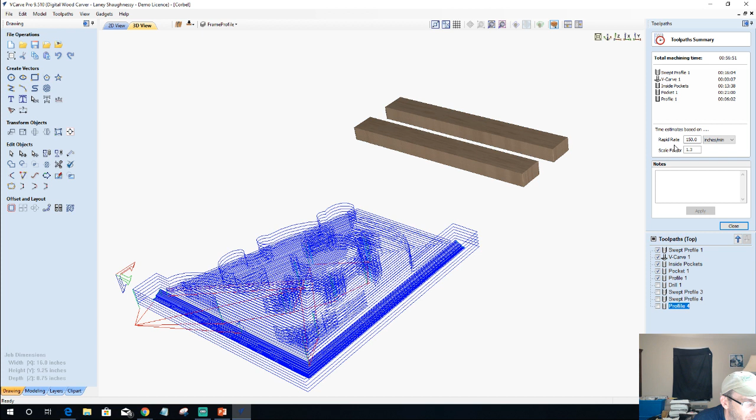So now, if we look at these two or three pieces, these three profiles, we're at 40 minutes already. So our centerpiece, that's got to be a quick one, right, in order to stay competitive, because I think they're going to be about the same time. Let's go in here and let's get our part.

And let's take — I'm going to just very simply snap some lines. Oops, not text, lines, lines. I'm going to snap some lines here. Space bar. Oops. That line went a little crooked — bear with me a second. Line, 90 degrees.

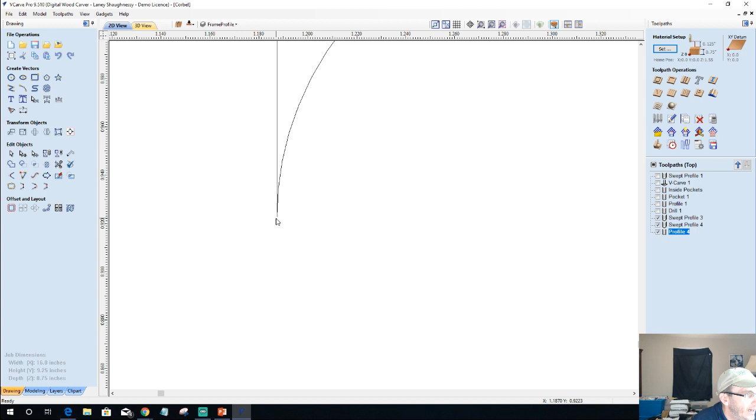Okay, and now I'm going to come in and trim away. Oops, wrong one. Oh, dadgummit — the reason why that's trimming away is because I'm overlapping here. So real quick, let me fix that overlap. Just had to make sure that was him.

Let's see here, bear with me. Going to delete that span, and then on this one, delete that span.

Use my scissor tool. I should be able to trim that line away and that line away. Ah, trimmed the wrong one on that one. This line away, there we go. Oops, trimmed the wrong one on both of them. Hold on a second, this line away and this line away. Thank you very much.

Got a little bit of an overlap here. I'll close him off in a minute. All right, so here's my part. Let's go ahead and make sure all the vectors are closed. Select all open vectors. All right, so he's closed.

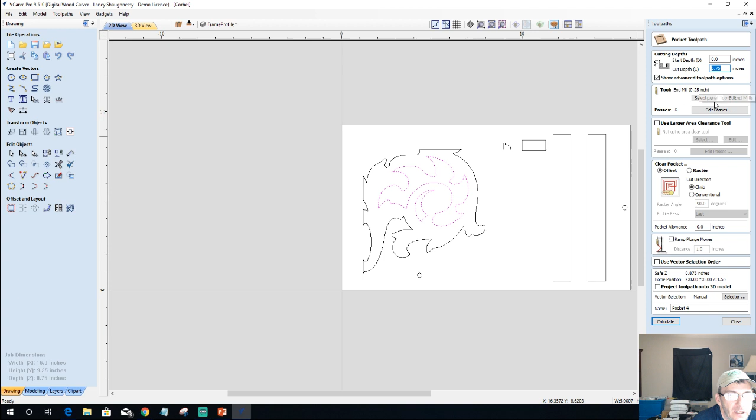Okay, so on this one we had our pocket cuts. This is going to be pocket cut, 0.75. No sense in doing it as a two-sided job, really, if it's going to be here. 1/4 inch end mill, calculate that tool path.

And then profile cut. This should be good still. Profile cut, 3/4 inches, calculate that tool path. And preview all of those visible tool paths.

Get rid of the overhang. So my 3 parts, you know. Now on this one, this part is 3/4 of an inch.

If I do not have on here 3/4 of an inch in my area here, then I would widen that up. I would widen these pieces up till I had 3/4 of an inch right here, because that's what glues to the top and the bottom of that. But that being said, I think you kind of get the idea.

And let's go into 1, 2, 3, 4, and 5. And if we look at the time on this, we're at 55 minutes. So we were at 56 minutes per side on that project, so 2 hours, versus if this was just cut out of 3/4 inch, 2 pieces, it would be 55 minutes for the whole project, on a 1 1/2 inch part.

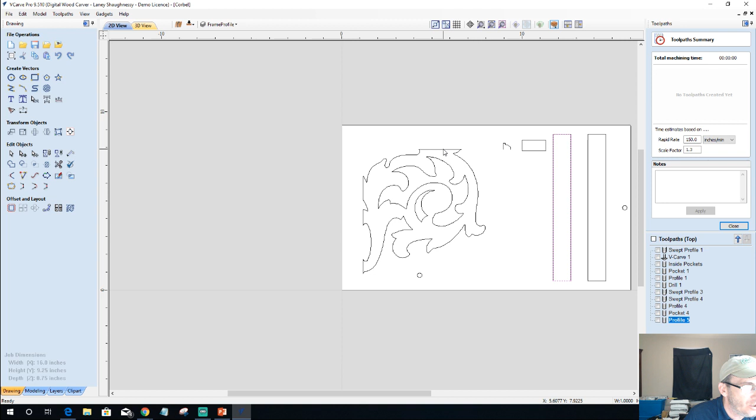You with me on that, Debbie? Everybody? These parts would be widened out to probably about 1.25 inches to 1.5 inches, so that this center piece here is 3/4 of an inch wide, because that's what attaches to the top and down the back side of this part.

Okay. Any other questions? Any questions?

Okay, so just definitely, it's something to think about. Something to think about, whether you make it as one part or make it as two. Now, when it comes to the 3D model corbels and all, you would be making them as one part. That's why I kind of focused on that.

And, but making these out of 2 parts and gluing them together, there's nothing wrong with that. And then, of course, on the side where the shelf is going to be covering, and on the back where it's going to be in the wall, you can reinforce that glue joint, which you really wouldn't need to, but you can secure with countersunk screws into there, on those parts, even down here and up here, or just glue, and what have you.

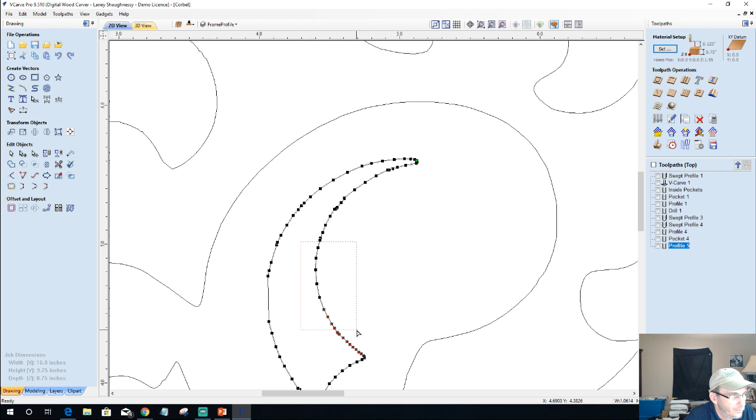And by the way, all these nodes are not necessary at all. We could absolutely delete every single one of them and just create a Bezier curve with 2 nodes. That will shorten up the time frame, because the nodes, all of these nodes and everything—these are lines, these are lines in your G code and all of that. Something to keep in mind.

This will make sense in a minute. Actually, I'm not going to do it that way. That was stupid, why would I do it that way? Let's do it this way. Let's get back to here where I was.

Let's cut the vector right there. Cut it.

Okay, and then we're going to put the transform mode here. We're going to rotate. Now if I click on this center box here while I'm in transform mode, I can get my pivot point to pop up. And if I grab this pivot point and move it down here to this corner, I can now pivot off of that point. I can pivot off of that point.

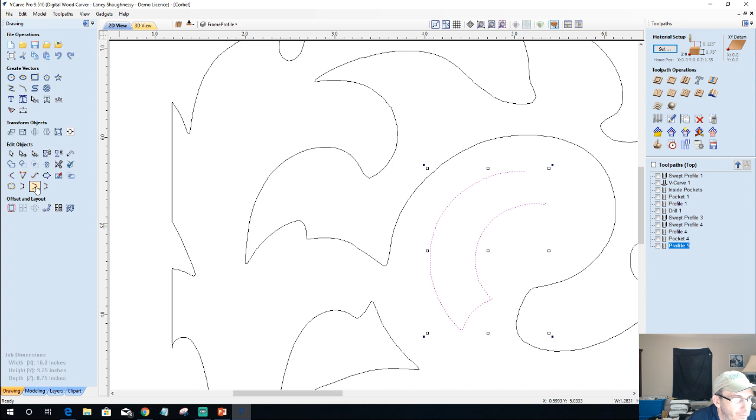And then I'm going to take these two vectors here and join them with a smooth curve. And I'm going to go into node editing mode and fix that curve.

Let's get rid of some of these nasty looking jogs here. Let's take these and hit D on our keyboard to get rid of that. Let's get rid of this. And let's pull this back into a Bezier curve.

And let me fix this little issue that I created for myself down here.

All right, so with that fixed, if I go back and find my pocket cut, select on that there, and let's calculate this.

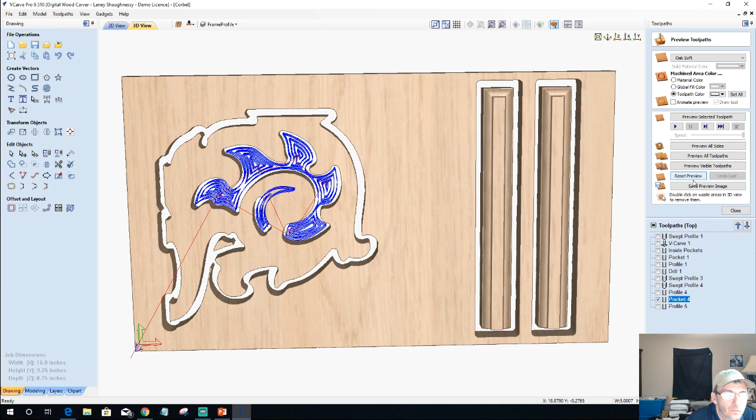Preview, let's reset that preview and preview the visible toolpath. Okay, I went blank there for a second. Thank you, Ronald.

All right, so you can get that swirl to come more around. And we could have finessed it and cleaned it up a little bit more, whatever the case may be. But just long story short, however you want to do it, whatever shape you want.

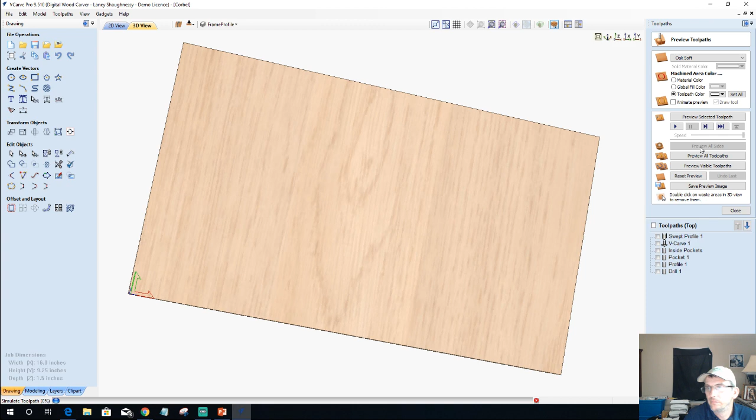Now keep in mind your shelf board, right, the shelf board that's going across the top. You can create a decorative profile to go around the outer edge of that shelf board, the same way that we created the profile in here using that molding toolpath, so you can have a nice little decorative edge around the outer 3 sides of your shelf board as well. So keep that in mind when you're cutting the shelf board out.

Now, of course, a lot of people will just take the shelf board over to the table saw and cut it out, maybe run it through the router table with a profile bit in it, which is absolutely acceptable, definitely. It's going to be time saving and all, but if you didn't have a router table or router bits or handheld routers, all you had was your CNC machine, you can absolutely achieve that on your CNC as well.